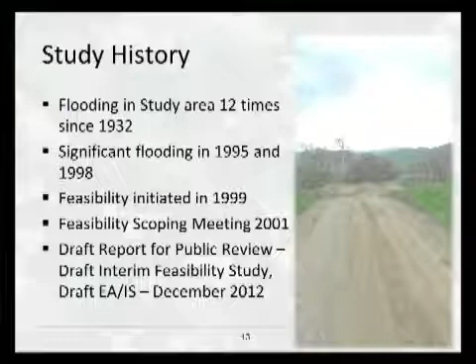That draft report just hit the street on Monday, and it's out for a 30-day review by the public. In fact, I believe two copies were FedExed here to the city—one in your library and one in City Hall, with some additional copies coming by standard mail. So it'll be here within a few days.

The Army Corps is the lead on it. It's a federal document, and they're the federal agency. So that's a little bit about the history and where we are today.

Now I want to talk a little bit about what the issue is, what the problem is, and what are some of the possible solutions.

I'm going to start with the watershed. The watershed area consists of 134 square miles to the west of us, up into the coastal range and into the valley. Crow Creek is an additional tributary area that flows into Orestimba; it includes 27 square miles. Then the alluvial fan, closer to the city of Newman in the downstream area, consists of about 45 square miles.

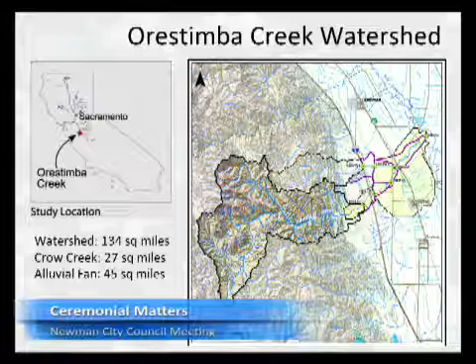The study area—it's kind of hard for me to see on this screen, hopefully your screen shows the detail a little bit better. The study area is essentially bounded on the east side by the San Joaquin River. On the southern side, it's really the county line, a little bit south of the city of Newman. On the western side, it is essentially Interstate 5 and does go up into the valley a bit.

There is quite a bit of critical infrastructure in this study area—just some of it being the two substantial canals, the California Aqueduct and the Delta Mendota Canal, Highway 33, a rail line, transportation corridors, roadways, and of course city facilities including emergency response facilities.

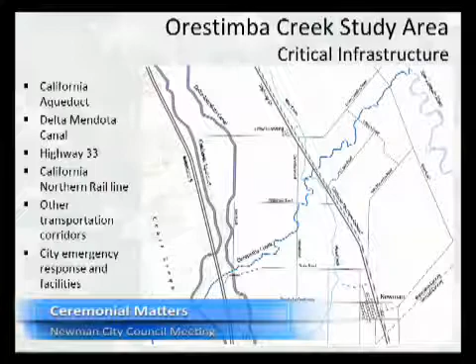This is an interesting table, and I'd like to stop here for a moment. This is the history of the Orestimba Creek. The line I'm pointing to represents 5,000 CFS, the point where the city starts to flood. Anything above that line is water that got into the city, and there are actually 12 instances where that happened. One of them is right on the line.

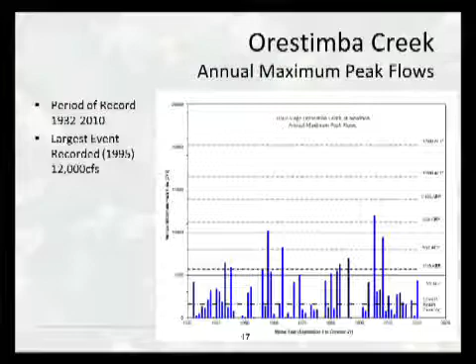If you've ever heard us talk about the Orestimba Creek project, we normally say 13 floods in the last 50 years or so, because we count that one—it got a little bit of water into town, but it was right on the edge. If you look closely, and maybe even better on your paper, you can see the years the city flooded, with a couple of substantial ones right here, which we're going to talk about now.

In 1995, there was 12,000 CFS coming down the creek during that event. The creek itself can only handle about 1,700 CFS, so nearly 10 times the amount of water came down than the creek could handle. What typically happens is the water, as it flows down, starts to spill out right around the Easton Road area. It runs along the CCID canal, spills over it or through it in some areas, hits the highway and railroad tracks, and runs straight into town.

In 1995, there was substantial water in town that resulted in $5.6 million in damages, including a lot of crop damage as well.

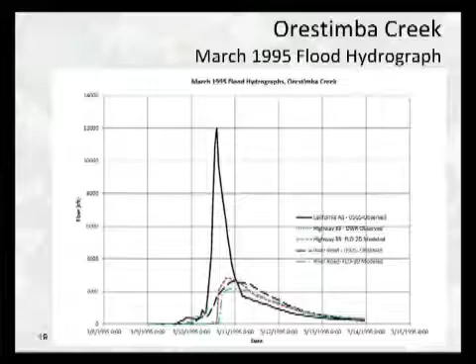Here's the hydrograph for that event. You can see the spike. It's a very quick event, almost like a flash flood. When that water comes down, it comes fast, and doesn't stay for too long. I think it was a matter of days, certainly not weeks or months. It's a quick event, but very devastating.

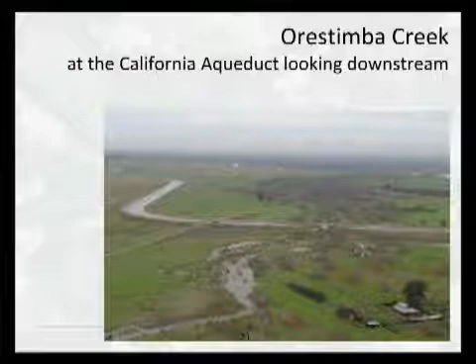Here's a view looking downstream from that valley area, and you can see the canal. You can also see some of the transportation infrastructure.

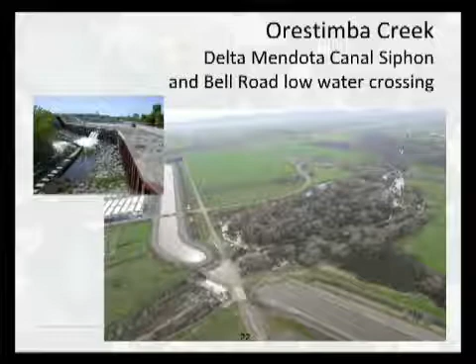Here's a view of Eastin Road in a flooded condition. In 2007 we installed these railroad-style arms—I'm pretty certain everyone here has seen these before. There was actually a fatality on the creek in 2006, and another in 2009 or 2010, when someone drove around the arms and decided to get into the water, unfortunately.

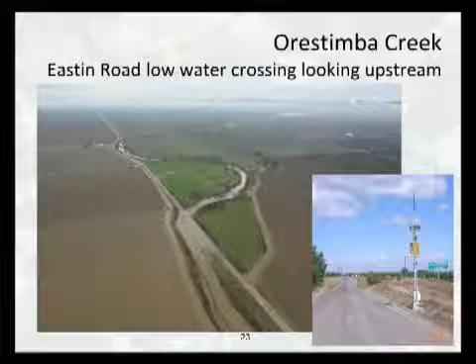Here's another view of Eastin Road, this one of Jorgenson, taken before the arms were installed in the summer of 2007. This is how we used to close the road, with just barricades.

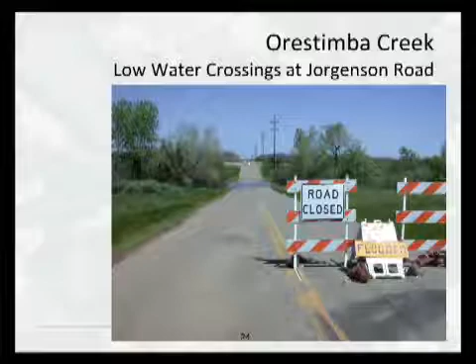By the way, over the Christmas weekend we had quite a bit of rain, and the arms came down on all three crossings. They were down for about 3 days. They're automated and pretty much foolproof these days, so we think it's a good measure to protect the driving public.

Here's a view of the railroad trestle. This has been a pretty hot topic as well, because when the creek runs really full, it pushes a bunch of brush down onto the trestle, which backs up water. It's been part of the alternatives almost from the start, and it's still a good element.

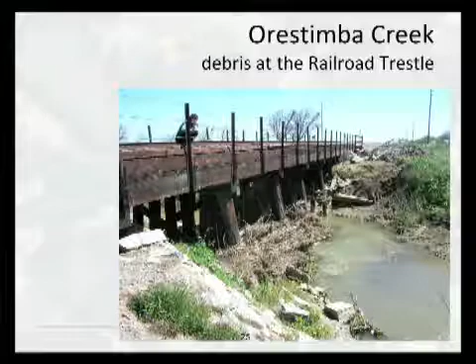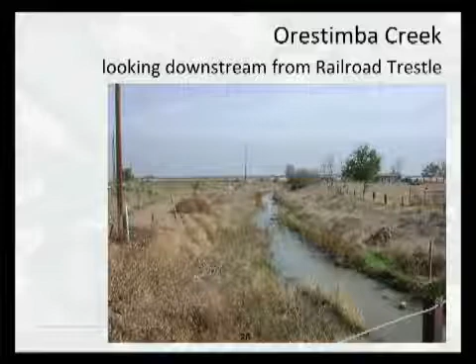This is a view downstream from the trestle. The creek starts to open up a bit and has a little more capacity. Further downstream it has the same width but is a bit overgrown, and I don't have pictures further downstream than this—it gets more difficult to photograph.

Where it's really devastating is right here in town. This was the '95 event, about a 1 in 60 year event. This was the 12,000 CFS that rolled into town, and in certain parts of town the water was 3 feet deep or more—a lot of water in town. Mayor, you were helping out during that event, so you know a lot about it, probably more than I do, but here's a couple of pictures to share.

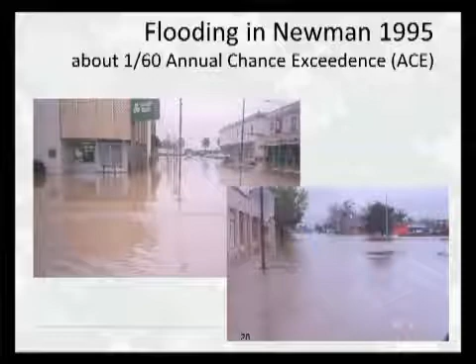The problems we have with this type of flooding include risk to life and safety, flooding of the city and surrounding areas, loss of public services, and extensive flood damage—$5.6 million in 1995. I have a little more information about that coming up.

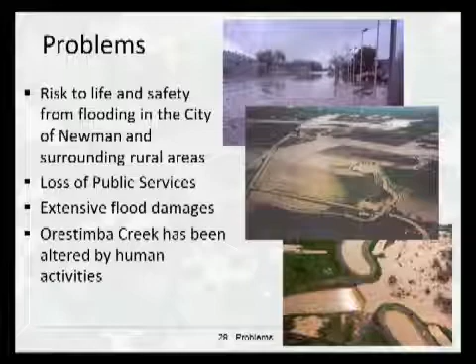So the objectives of this flood control project are to reduce the probability of flooding in the study area, to reduce the damages in the area, and if we can, to include some environmentally sustainable design. We do talk about that a bit in the channel mods.

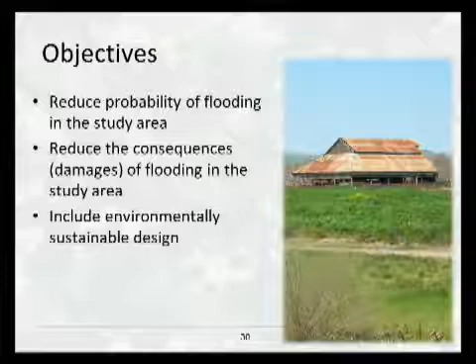Some of the local concerns, of course, are to minimize the maintenance cost, the annual maintenance cost of this facility. And then one of the other ones that is more of a local concern than of Army Corps is to reach a 200-year level of protection.

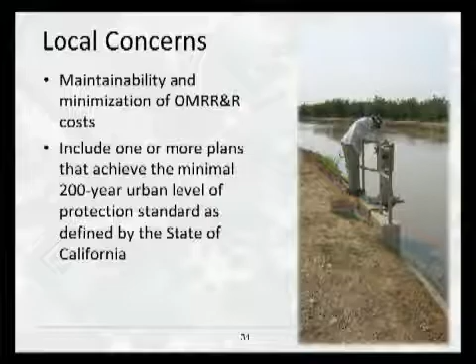This is important these days because the state of California passed a law a couple years back called SB 5. SB 5 requires this 200-year level of protection for any new development, especially with regard to annexation. So this is a critical piece for urban areas, and it's certainly been one of our objectives and concerns to achieve through this process.

This is a map of the without-project conditions, showing a 100-year event mapped out with the limits visible. One thing I commented earlier applies here as well: there's a high probability of flooding, about a 1-in-10-year event that the city floods. So this is the 100-year event, but even at the 10-year event, we see water in town, which is not good.

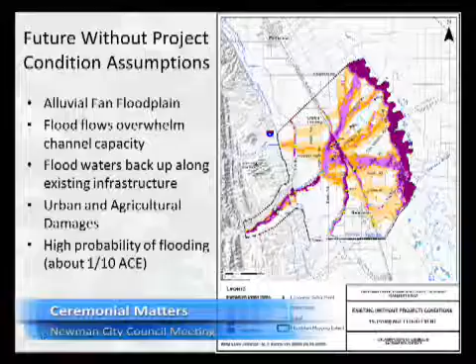This table shows the number of structures, and it's pretty interesting as a comparison between the rural and urban areas. The total number of structures combined is 1,365 in the study area, with the vast majority in the urban area—I think it's 1,207 compared to 158.

This is important because we use the number of structures to calculate the risk of damage to these structures and their value. At the end of the feasibility study, we need to calculate the cost of the project versus the benefits, or what we can protect.

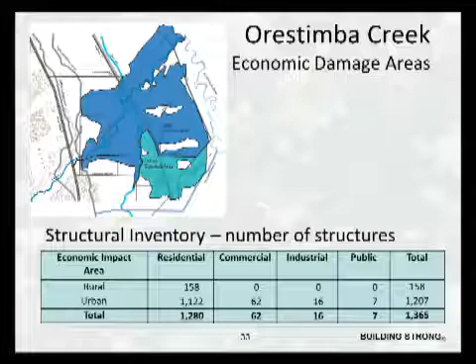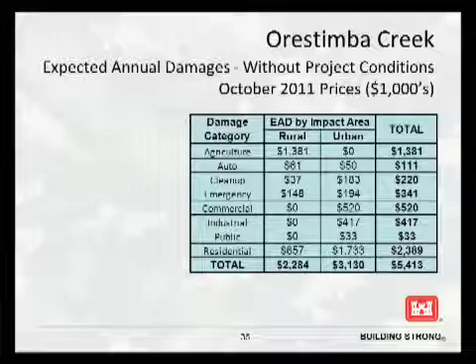Then we looked at the potential damage, the total dollar amount, and we put it into an annual damages category. If you look at the bottom right, that's $5,413,000 of annual damages we're trying to protect against. We put it into an annual number because we also want to put the cost into an annual cost, which would include the capital cost spread over years and the maintenance costs per year. So that's the magic number on the damages side—the $5.4 million per year.

And then we start to look at alternatives, because now we know what the damages are, and then we can look at alternatives and what those costs would be.

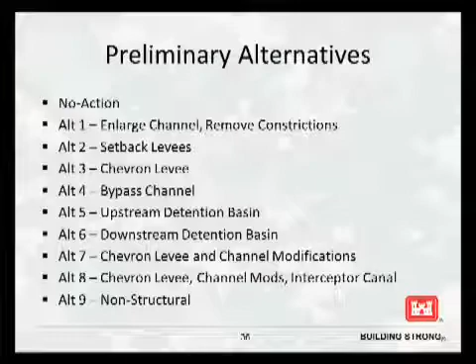We studied 9 alternatives. The first one, of course, is the no-action alternative, which is not a very good option. But then we got into the real alternatives, and we'll go through these kind of quickly because we have quite a few slides to go through still.

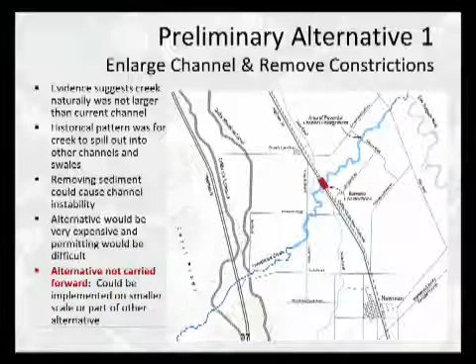Alternative 1 was just to enlarge the channel and remove all constrictions. But that's a tall order—it's a very long channel, very windy, and to truly enlarge it to handle 10 times the flow it has today became very, very expensive. So this alternative was not carried forward.

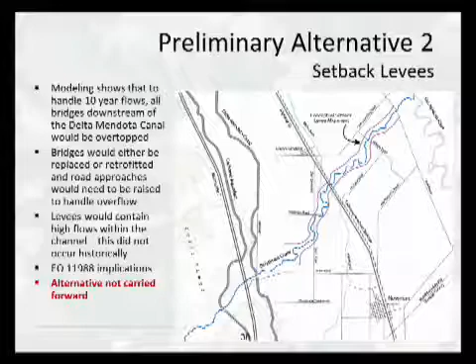Then we looked at what if we left the channel alone but put levees along the edges, set back. But remember, we're trying to hold 12 to 15,000 CFS. So the setback was far, far back, and it became very, very expensive and impacted a lot of ag land and homes. So this alternative was not carried forward.

This alternative, number 3, is a Chevron levee. It was the first iteration of the Chevron levee, and if you look at the east-west segment of it, it was along Stuhr Road. This wasn't locally popular, but the concept was pretty solid—the idea of a levee to protect the city was solid. So this alternative was carried forward, but it was modified, and we'll see that here in a moment.

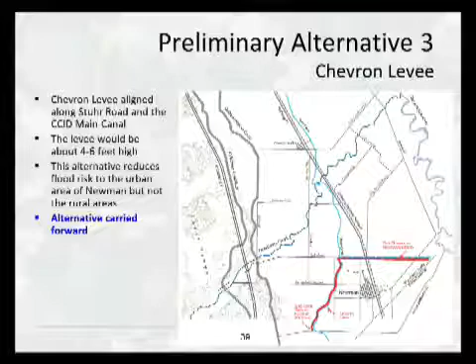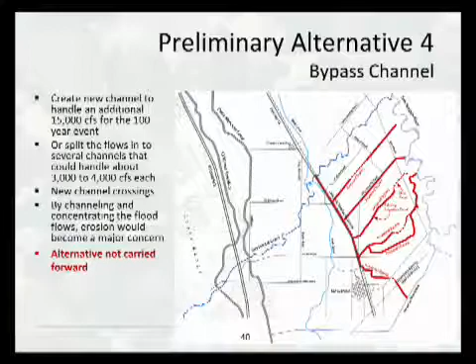Then we looked at a bypass channel concept where you pick up the flow around that Easton Road area, and you create a new channel for it to flow all the way to the river. But this new channel would be a very large pipe or maybe a dedicated canal. To carry 12 or 15,000 CFS became very, very large and very expensive, so this alternative was not carried forward.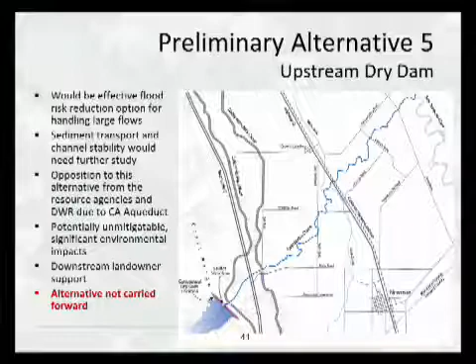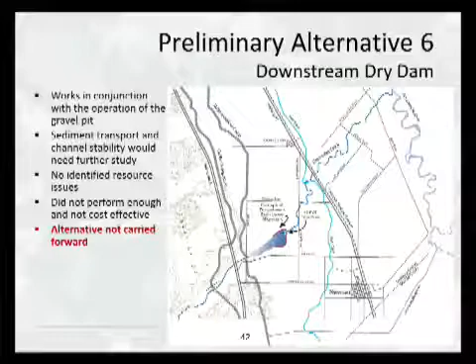The downstream dry dam was actually at the aggregate pit, and I imagine most of you are aware of where that is located. It was pretty effective—we would have to build a small dam on the creek, but the value of that operating aggregate mine became very expensive. So this alternative was not carried forward either.

Now we're getting into some real alternatives that you'll see even further on. This was the Chevron Levee, and this is that modified concept where it was on Stuhr Road, and now it's pushed up to about the Lundy alignment. This gives the city more space to grow and matches up with the general plan quite nicely. So it's a modified Chevron Levee with channel modifications.

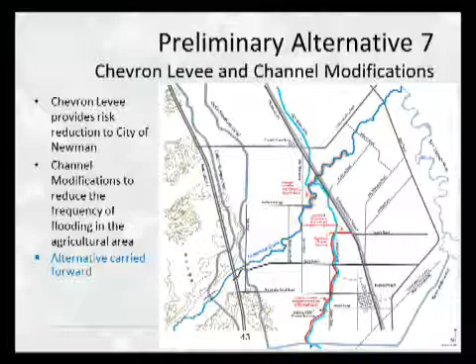The channel mods would run from about the Easton Road area to quite a ways downstream of the trestle, increasing the flow of the creek to about 3,500 CFS. This provided additional protection to the ag area. The ag area today has about a 2-year protection. With this channel mod, they would have about 10 years of protection, and the city with the Chevron Levee concept would have 200 years of protection. This alternative was carried forward and continued to be studied.

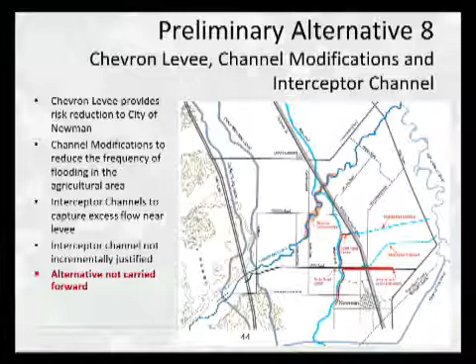Alternative 8 was kind of a hybrid of all of these—it had the Chevron Levee, had the channel mods, and had an interceptor channel. But the cost became fairly high, well beyond the potential damages, so this alternative was dropped as well.

And then, of course, alternative number 9—these are non-structural measures. These are, in essence, things that we can control today: educating the public, land use decisions, building permit decisions on when to issue and when not to issue. This is something that we could do today. Not always easy, but it's possible. They're non-structural elements.

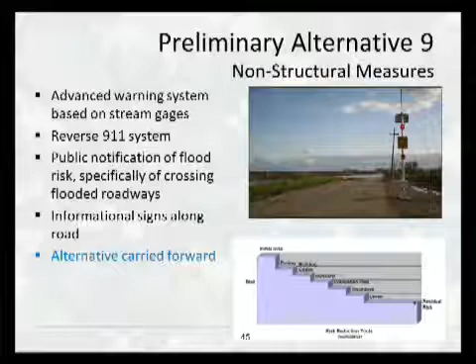Here's a table summarizing all of them. What's important is to look off to the right and see which ones we've carried forward—they have a yes in blue next to them. The Chevron Levee is clearly being carried forward. The Chevron Levee with channel mods, and the non-structural alternative, are also being carried forward.

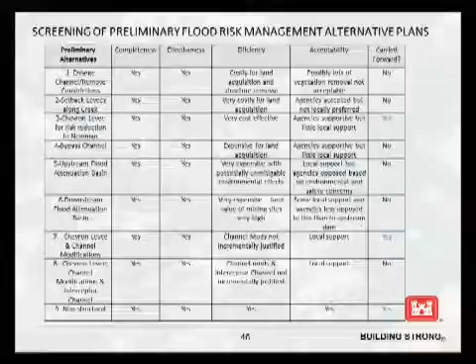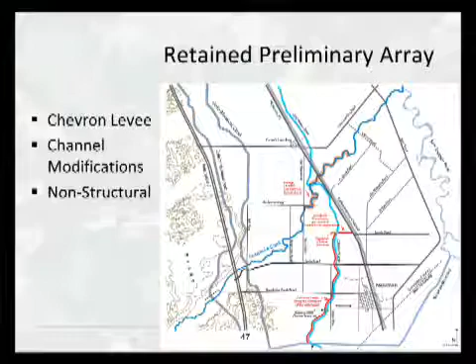This is a picture of the Chevron Levee with the channel mods. It includes some descriptions of where we would stop and start—at Lundy Road, on the east side of the CCID Canal, stopping at the southern area of the Newman Wasteway. You can see some of the detail here of this alternative that was moved forward.

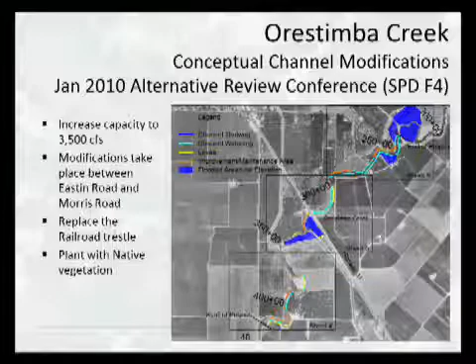As we moved into the detailed study of this alternative, once we narrowed it down to these 2 or 3 alternatives, we started by really looking into the channel mods. The channel mods became somewhat complicated because of land uses around it—some permanent crops that would have to be impounded, some homes that would be affected. When you compared that with the 3,500 CFS, the value of the mod, this became more challenging. When you looked at what this would protect, the cost actually became more than the land we would protect. So this portion of the alternatives didn't survive very well, but we studied it quite a bit to reach that conclusion.

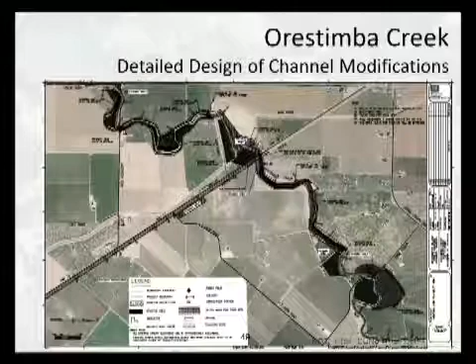Here's a little more design detail. We probably got to about 20% design level to understand some of the cost and some of the areas that we could protect with it. And then we had to do the economic evaluation.

We looked at the rural and the urban, and then combined them together. What's real important here is to look at the incremental benefits, the column on the far right of the table—if you look at the alternative that has the most incremental benefit, those are the winners. You can see the Chevron Levee is a clear winner as a total. That's an important item to acknowledge, because that's the alternative that carried forward into the draft document.

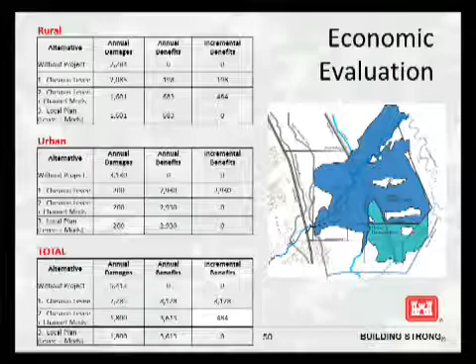So at the end of the study, but of course it's not really the end because the draft document is just that, it's a draft until we receive public comment. We had two alternatives, really. We had an NED, that's the Corps' most economical version of the Chevron levee, and then the LPP, the locally preferred plan, based upon 200 years of protection with freeboard.

The NED actually does protect against the same water elevation, the 200-year level of water, but it doesn't have freeboard, so it could not be a certified levee. That's really important, especially to an urban area that in some cases is paying flood insurance. To avoid paying flood insurance, you have to be behind a certified levee to lift that floodplain cloud off your land. So the NED physically protects you, but doesn't give you the certification you need going forward. The LPP does.

And the difference is the freeboard. There's about 3 foot of freeboard, and that's the height of the levee system. So these two alternatives carried forward into the draft document.

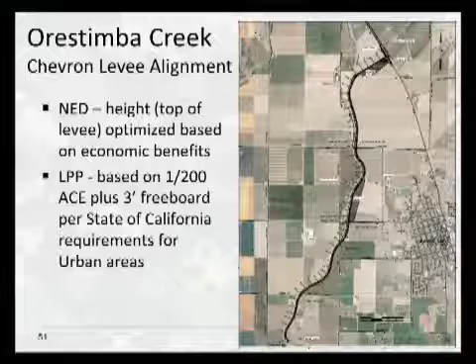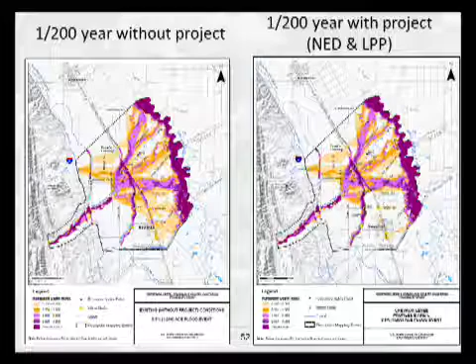We can see what they look like in action. This is a computer model with project and without project. You can see with project, the NED and the LPP, because remember, they protect you the same from a physical standpoint—there's just a certification difference. You can see the area on the right-hand side and the bottom right, all that area is now not being flooded, which includes the entirety of the city of Newman and quite a bit of ag land around it. That's the project in action.

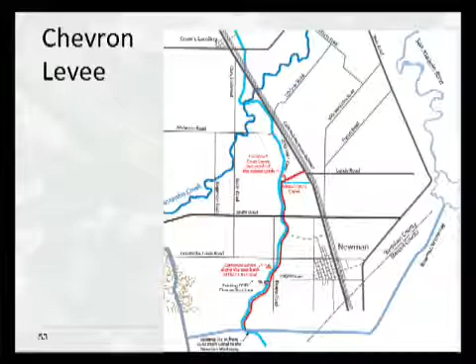And then here's a little more detail about just the Chevron levee without the channel mods. This is what the project would look like. I think the levee is about 7 miles in length, so it's a pretty long levee. It does parallel the CCID canal on the east side. And here's a cross section of it.

This actually shows what I was trying to describe in terms of elevation. The way I look at it is I like to start by looking at the 200-year protection, so it's the LPP 200-year protection plus 3 foot of freeboard. If you look to the left, it's 114.8 foot of elevation. Then if you go down to the NED levee height, it is 112.8. So you can see the freeboard is within that range. They both protect against the same water, but one has freeboard and the other does not. That's really the difference between the two alternatives.

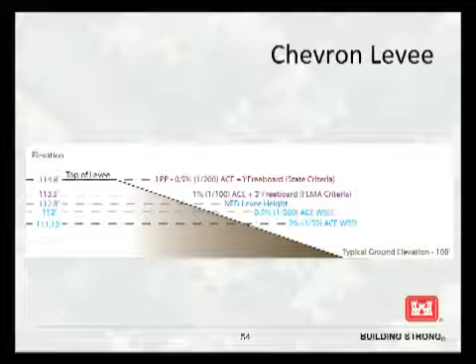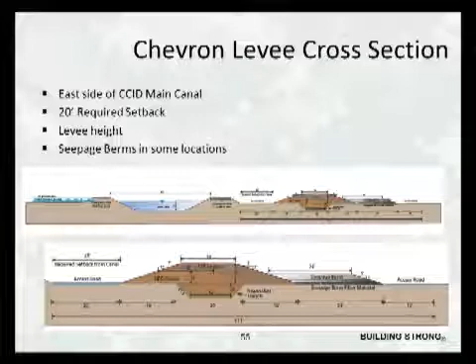Here's a cross-section of the proposed Chevron levee. It's offset from the CCID canal because the CCID canal was built long ago and didn't have engineered fill and isn't certified, so we had to set away from it with this new concept. So that's a picture of that.

Can we go back two slides now? I noticed the 3 foot freeboard FEMA criteria. Yes. Would that assist if we went with the FEMA criteria in federal monies, or do...

It would actually optimize your federal contribution, but it would not give you the 200-year level of protection that the state requires with SB 5. So it would be a good alternative from the federal side, but not from the state side. So if we went to the 3 foot freeboard, does that mean that FEMA, because it's over and above their criteria, would not be as willing to give money to the project?

Well, that's a good question, and one of my upcoming slides has that answer. The answer is they will completely contribute their full amount on the LPP. But it took about 6 months to get them to approve that because it's a waiver of their normal procedures. Normally, they say they will recommend only the NED, the one that's lower than the FEMA standard, and that's how they'll base their fair share of it, their federal share. We said that doesn't serve the community very well—we need to get to this higher level, and we want you to contribute your fair share to the higher level of protection. It took about 6 months to go through headquarters to get that waiver. In fact, your council and your city provided us a joint letter of support saying this is the right thing to do, Army Corps.

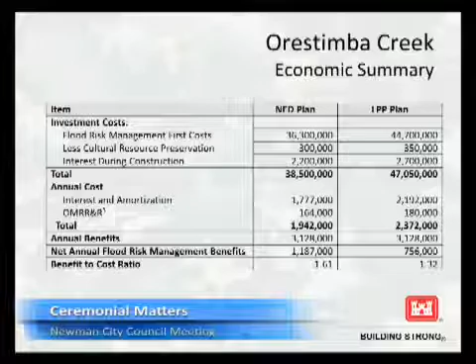At the very bottom is another important number, the benefit to cost ratio. The NED is 1.61, a great number, always has to be more than 1 or you don't have a project. The LPP is at 1.32. Should this project move forward into design and construction, that's the number we'll compete with at the federal level, the number we take to Congress saying we've got a great project. It's well above 1, so it's a pretty solid project before us.

Then there's the policy exemption request, which was finally granted, we've already talked about that a bit. The recommendation of the draft document today is the LPP. It is the recommended project.

Now a little bit about next steps. The public review runs January 7th, starting this past Monday, through February 7th. The Corps commented they would even accept comments a bit past that, so if people want to take time to review the document, they have plenty of time.

At that point we'll have to address any comments received. A final report will be prepared and submitted to SPD, the South Pacific Division. The Corps has their divisions and then their headquarters, with this division out of San Francisco. That's where the final report will go, and then they'll submit it to headquarters back in DC.

Then it goes to the Civil Works Review Board, which is essentially where it gets the final signature of approval, and the document is done. There is a 30-day final agency and public review before the signature goes on it, but that's a pretty minor step. The final product is what they call a chief's report, produced after the document is finalized and entitled, and that's what you take to get federal funding as you move into the next phase.

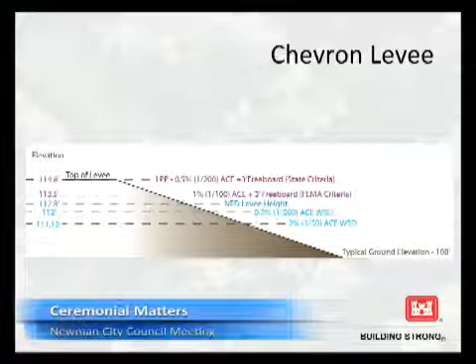Any other thoughts or questions? Michael, I have a question for you.

Our northern business area and the build-out toward the CCID canal—with the Chevron levee, would that pretty much limit us to this side of the canal?

Well, our general plan puts the CCID canal as our westernmost boundary anyway. As part of the general plan process, that was one of the measures we took to protect prime farmland—to say we're not going to grow past this canal. We consider everything on the west side of the canal to be prime ag land, and this would now unfortunately be on the east side. At that point in time, the levee originally was placed on the west side of the CCID canal; it has since been moved to the east side. So now, if this has been released, we'll have to incorporate some of these project-specific things. What we're looking at here is about 110, just over 110 feet, along the eastern boundary of the CCID canal.

So now we're going to have to build this into the northwest quadrant master plan area, which at this point was set aside for very low density, more executive housing. So now we're going to have to increase that setback from the canal, but we have time to work that into the EIR because we're in the early stages of that.